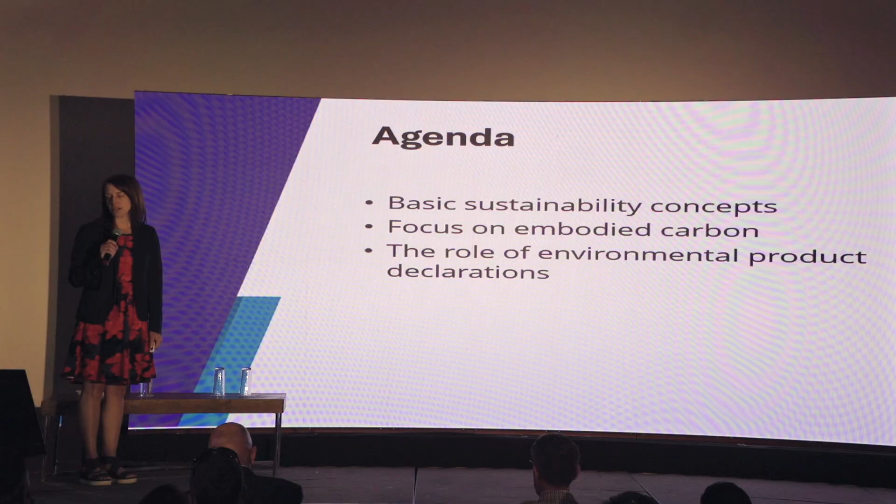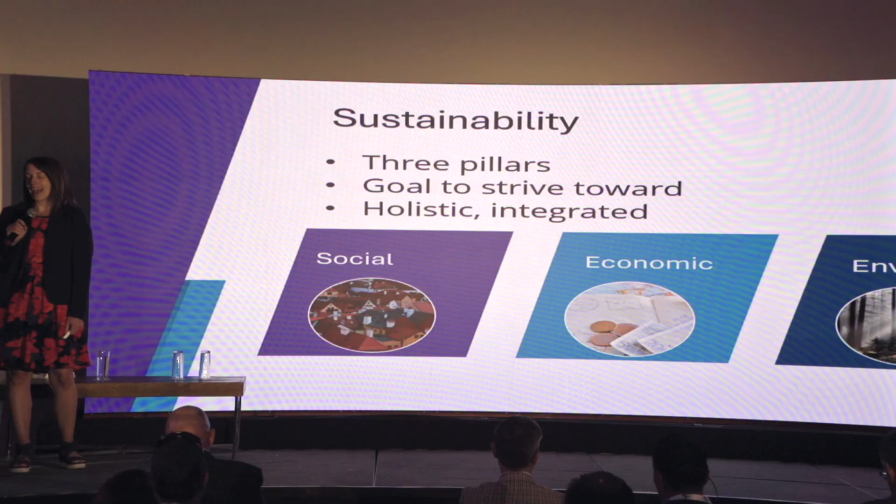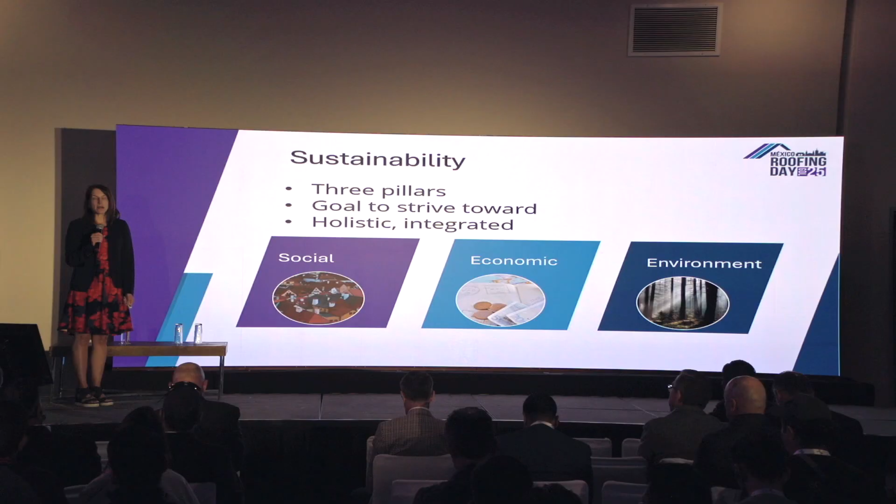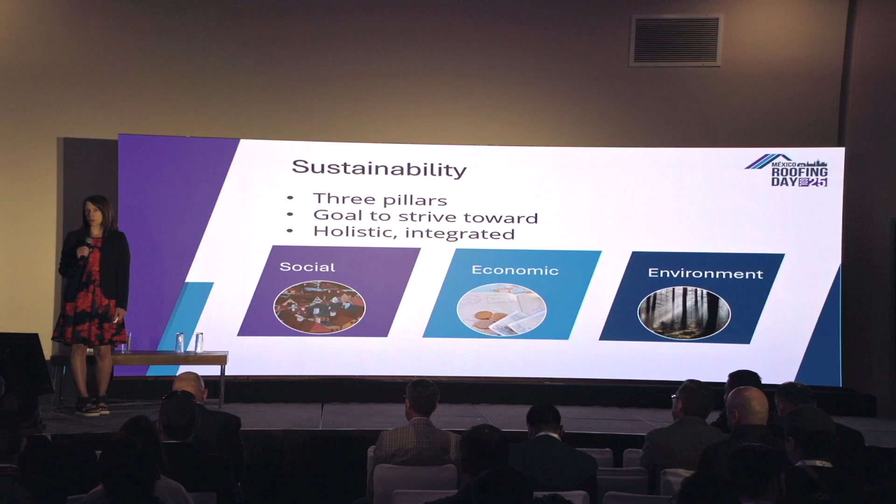All right, now if we start at the very high level, sustainability actually has concepts related to environmental impacts, our impacts on society, and as well economic impacts. Typically when people talk about sustainability, they're only talking about environmental impacts. But 30 or 40 years ago, when sustainability first came to the forefront, the focus was that we really need to keep all of these concepts in the front of our mind, because if you can't afford to do a project, or if you have to inconvenience the public so much in order to reduce your environmental impact, then it's really not sustainable.

And sustainability can be used as an adjective for many different things. You've heard of sustainable manufacturing, sustainable design, sustainable buildings. But why are we focusing on buildings so much? The truth is that buildings impact the environment overwhelmingly when it comes to the amount of energy that we use globally. The use of our buildings accounts for about 36% of global energy use, and that energy use also contributes to our global greenhouse gas emissions. In the US, 40% of the energy usage goes to buildings.

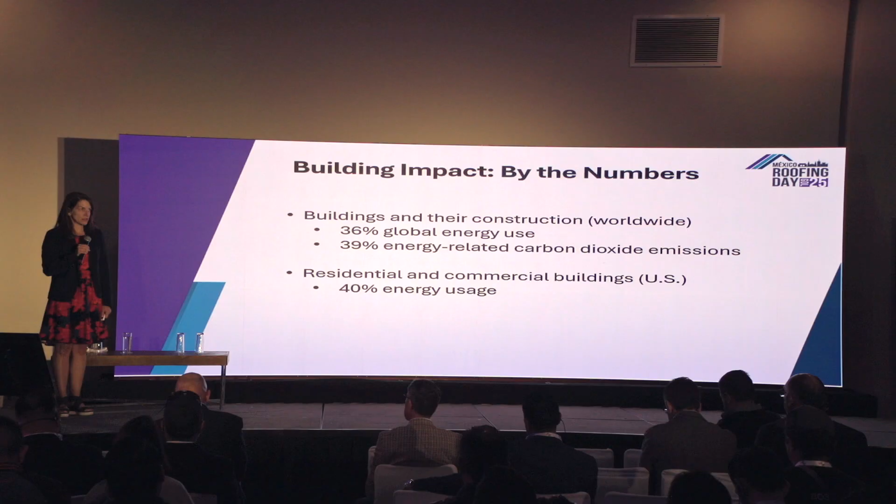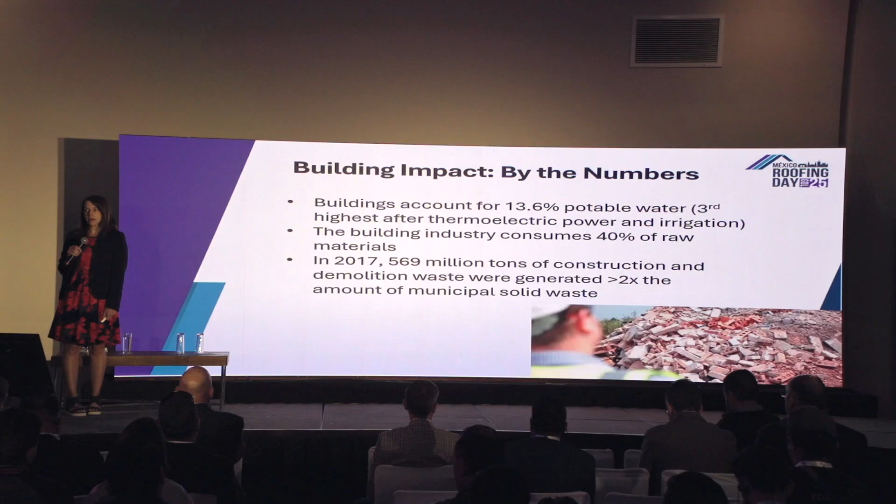Our buildings also use a lot of water, and certainly in some areas of the world, water is a very scarce resource. So the fact that almost 14% of all potable water is used by buildings is something that we should be mindful of. And we also consume a lot of raw materials, and we generate a lot of construction waste using our buildings.

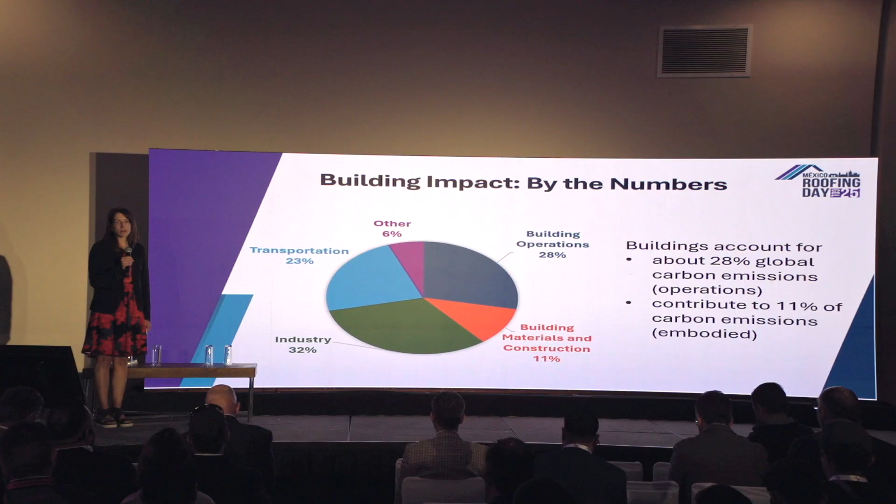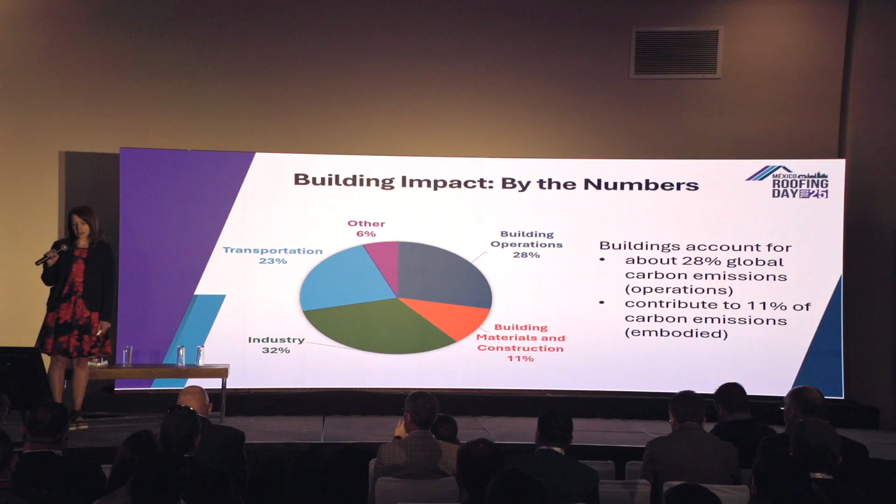So this is just another graphic to show the global carbon dioxide emissions attributable to buildings. And you can see that 28% of our greenhouse gas emissions are attributed to the energy use during our building operations, and another 11% or so is attributed to the materials that we use in our buildings. That's where we get the 39% of the greenhouse gas emissions. Other emissions are attributed to other industries and, of course, the transportation sector.

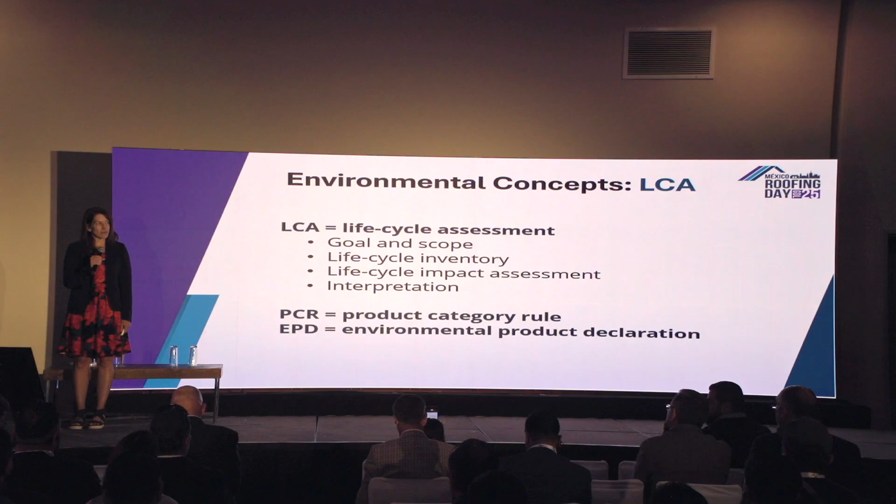When we speak specifically about environmental impacts, one of the concepts that is important to understand at a high level is life cycle assessment. You may have already heard of life cycle costing. This is very frequently used by customers that own their buildings and use them for a long period of time, factoring financial choices into initial costs and then maintenance and replacement costs. Life cycle assessment is similar to that, except instead of using dollars, we're talking about environmental impacts.

It's a method that we use to quantify the environmental impact of the choices that we're making and the products that we're choosing. We perform a life cycle assessment in order to develop an environmental product declaration.

So for any type of product, whether it's an asphalt shingle, and that's the example that I'm going to use today, or any other water barrier or any other material that we may use on the building, our fenestration, our windows, we can develop an environmental product declaration for those products that is a snapshot of their environmental impact.

And related to that is product category rule, and those are the additional rules that we use for a certain category of products, so maybe all roofing membranes or all insulation types will have a product category rule, which helps ensure that the EPDs we develop in a given product category are developed relatively the same, so that they have the ability to be compared.

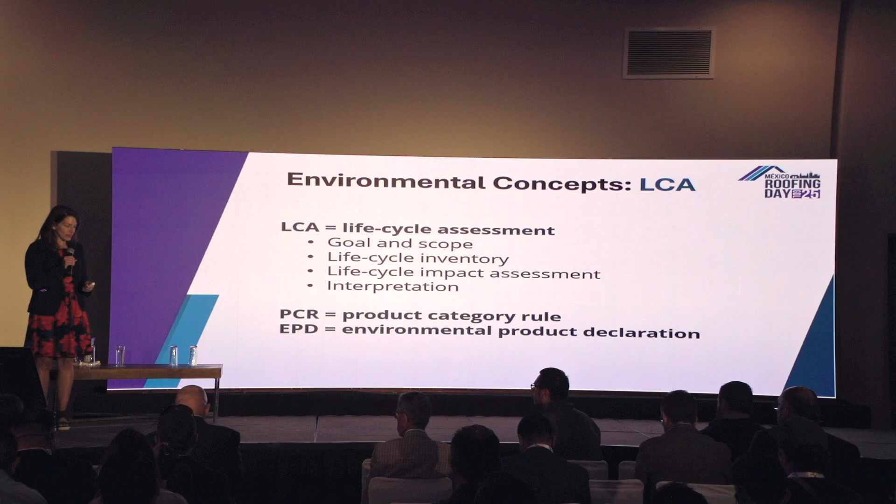Now, we've already talked a little bit about why we are focusing on embodied carbon, although you may not have realized that that is what I've been talking about thus far. When we do these life cycle assessments, we typically look at 5 environmental impact categories. They are up on the screen here. So acidification, what is the potential for creating acid rain? Eutrophication, what are the runoff from our farm fields that might cause algae blooms in our freshwater sources?

Ozone depletion, that is pretty self-explanatory, as is smog formation. So those 4 categories are also evaluated every time we do an LCA and develop an EPD. But the one we're focusing on is the global warming potential. And that is where you're going to find your embodied carbon.

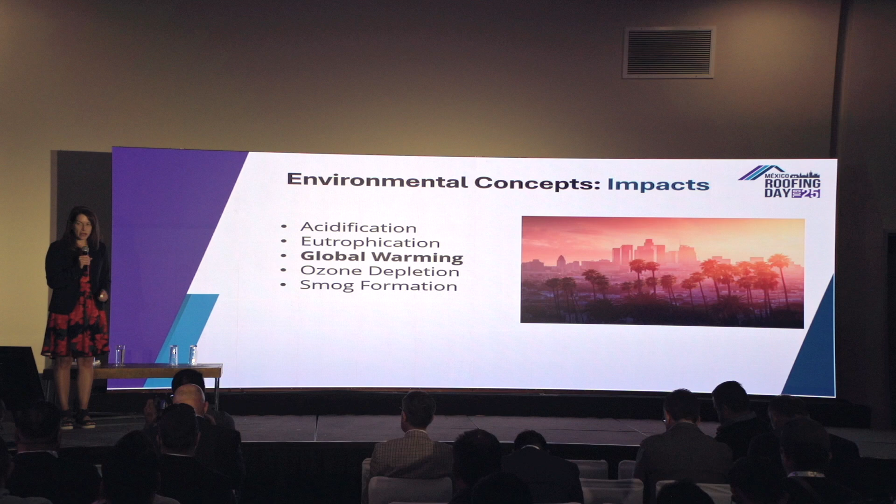So there are a few definitions out there for embodied carbon. They mainly have to do with summing up or adding up all of the greenhouse gases that are generated and emitted due to a certain product. And so it's either this ISO definition here, which is related to greenhouse gas reporting, which has to do with the emissions and removals, because some products do absorb greenhouse gases while they're in service or during production. And we're looking at just that single impact of climate change or global warming potential.

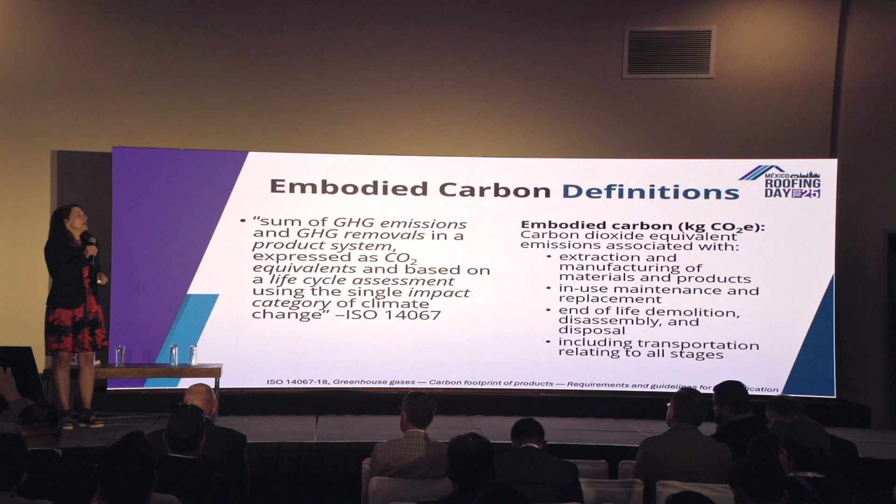The other way to look at embodied carbon, and this is from a structural engineering document that's out, is it's the carbon dioxide related to all parts of your production process for a product, from the extraction and processing of raw materials, transportation of those materials to your manufacturing facility, any greenhouse gases that are emitted related to use and maintenance, and then at the end of life.

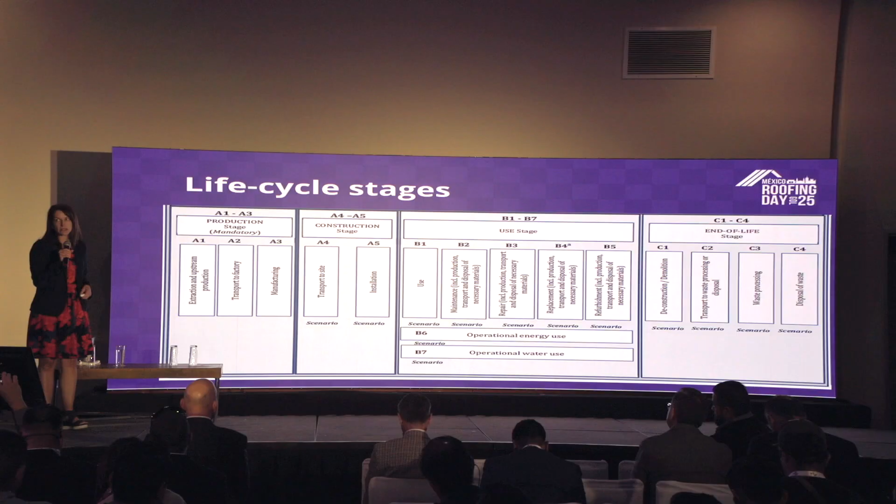When we talk about life cycle assessment, we typically break our product or our building life cycle into these life cycle stages. And so, starting with the letter A, any modules that begin with the letter A occur prior to the building being occupied or getting your certificate of occupancy. So it's production of all the raw materials in A1 through A3, and then transportation of those raw materials or products to the job site in A4. A5 captures all the greenhouse gas emissions that occur on the construction site.

And then once we get to the letter B, that is our use stage. And hopefully that is the longest time period on this continuum. And so that's where we categorize any of the greenhouse gases that are due to replacement and maintenance schedules. And then finally, anything that begins with the letter C, that is at the end of life. And so if you go to the end of life when considering your impacts, that would be what are your impacts related to demolition, recycling, transport to recycling facility or a landfill.

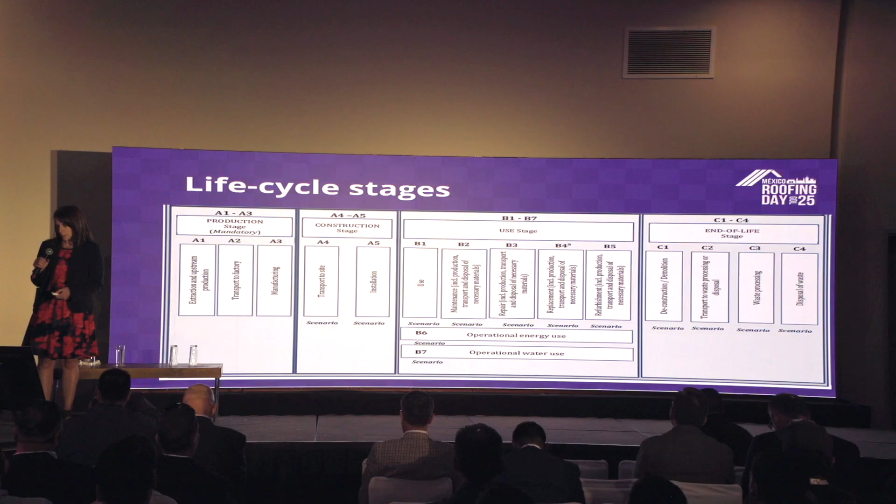Okay, so we already talked at a high level about what environmental product declarations are. They are developed according to an ISO standard, 21930. This is the ISO standard that we use typically in North America for developing EPDs. It gives us the rules for how to perform our LCA, and how to report our results in an EPD for all different types of building and civil engineering works products.

As I mentioned already, also, the product category rules are typically developed by industry trade groups for a specific type of product. So there are PCRs for insulation. There are PCRs for different types of windows. There are PCRs for different types of claddings. And so the PCRs are what helps ensure that if two different manufacturers develop an EPD for the same type of product, that the methodology behind the scenes to develop that was basically the same.

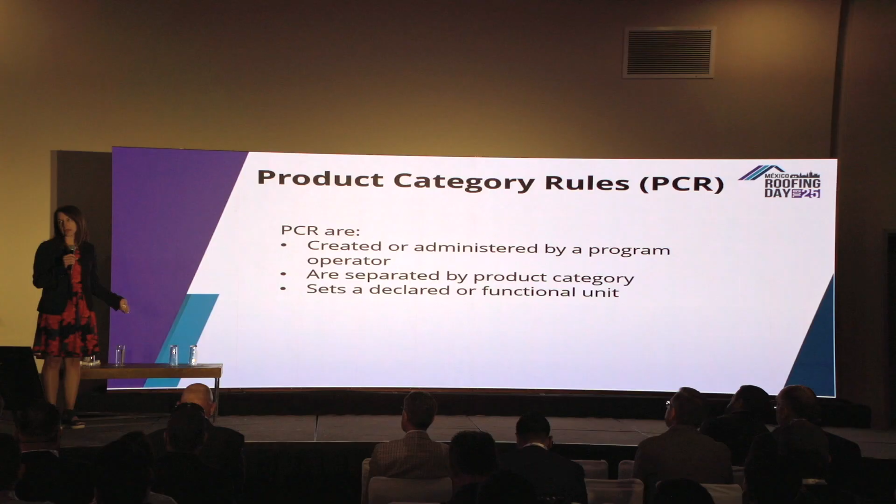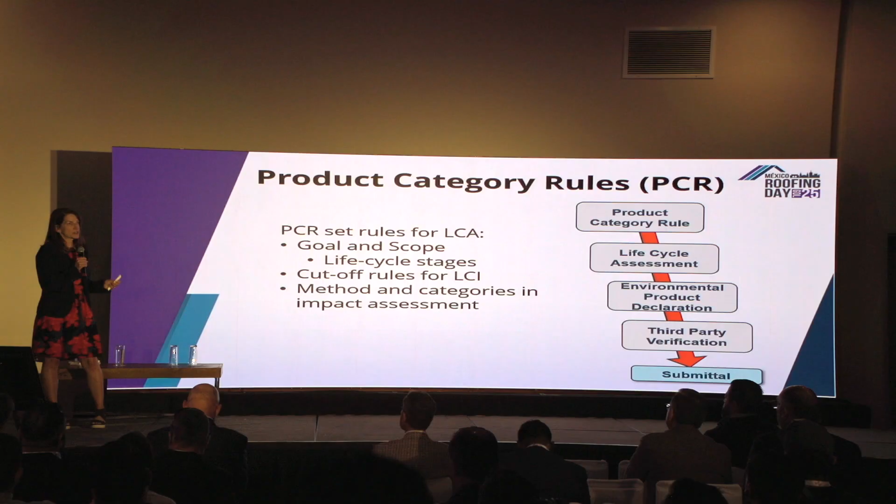So what they tell us in the PCR is that for those unique types of products, they decide things like how long do we assume the service life is, or what types of data should we be using in the background, so that we're really minimizing the differences between how two individuals could develop an LCA or an EPD, to minimize the differences that are due to choices that the LCA practitioner makes, such that the differences reported in the EPD are more likely to be due to true differences in the environmental impact of a product.

So an important thing to note about EPDs is that they are just a summary of a full assessment or a full model that has been created by an LCA. It's typically what we're using right now in order to report our embodied carbon data. But it's very important to know that because of the importance of the product category rules, or the PCR, when someone is trying to compare two EPDs, it's very, very important that the EPDs were developed using the same baseline PCR, which you can think of like a standard for how to develop the EPDs. Those need to be the same in order to even begin to think about comparing.

So frequently what will happen is, an example that I like to give is for concrete. I'm going to switch topics, we're off roofing for a second. For concrete, there's a difference between concrete that's cast in situ, or in place, versus concrete that's prefabricated in a facility. But sometimes, let's pick on architects. Let's say an architect says, oh, concrete is concrete.

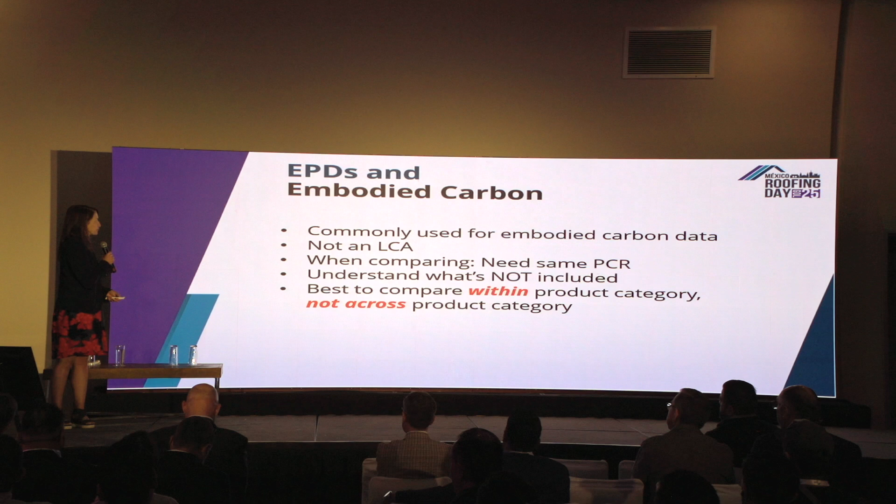All right, so when we're doing our analyses for embodied carbon, I'm going to go through an example using asphalt shingles. So when we're collecting data in order to develop an EPD for an asphalt shingle, when we think back to those different modules, A1 is our raw material sources. So you're collecting data for all the different components that go into making that asphalt shingle. You're going to have the asphalt, sand, you might have some mineral stabilizers, granules, scrim, lots of other things that go into creating that asphalt shingle.

You also have energy. You may have natural gas used in your facility, you likely have electricity coming into your manufacturing facility. Some of those energy sources and all of your raw materials are going to be transported to the asphalt shingle manufacturing facility. So A2 is where we capture all of the impacts related to transport of those raw materials to our manufacturing facility. And then A3 captures any of the environmental impacts that occur due to the actual manufacturing process. And this would be considered a cradle to gate scope. Most EPDs only have this scope right now.

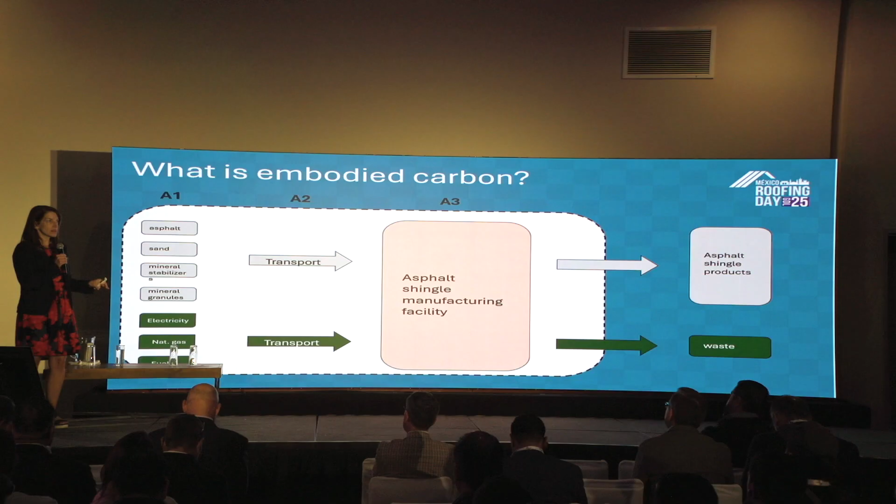So this is our scope. You can see our system boundary has the dotted line. And then when we do our mass balance of the system boundary, we're checking that all the materials coming in A1 are going out of the facility either as product or as waste.

When we talk specifically about embodied carbon, usually what's happening is that when we have all these different input materials, such as the asphalt and the sand and the granules, those products also have an upstream manufacturing process. For the sand, it may just be a quarry that those materials are being dug out of the ground, but that uses energy. For the asphalt binder, that's a much more complicated production process, but there's energy related to that.

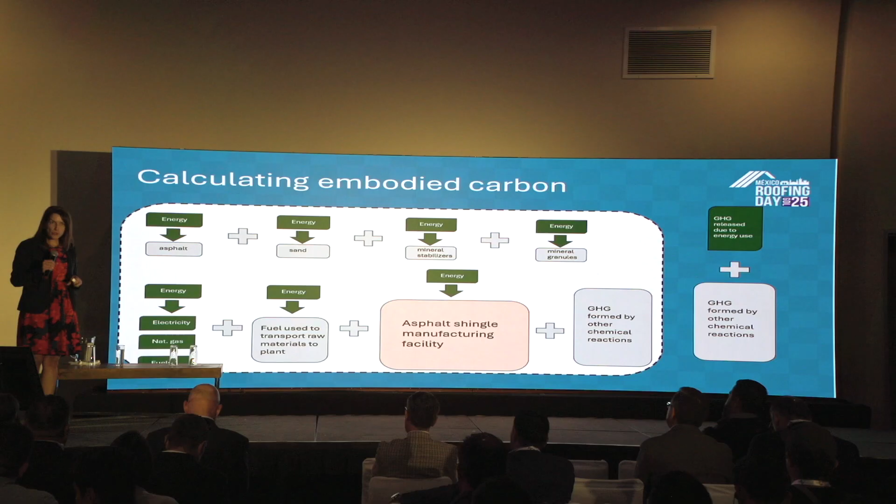So there's energy in all these different phases that are used as you go through the process. And so that energy, if it is not a renewable energy source, if it's a fossil fuel based source, when we burn that energy in order to do all of these things, that releases greenhouse gas emissions into the atmosphere. And so that's really what we're trying to capture in this process.

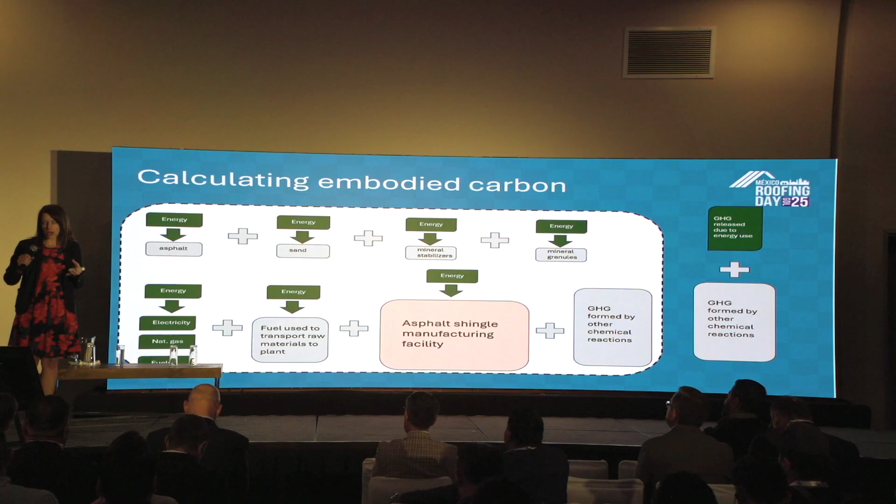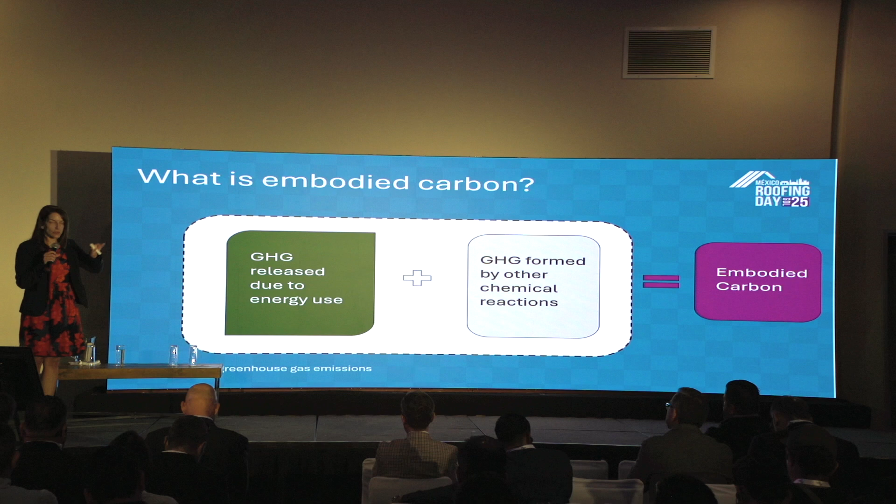So for the most part, it can be summed up for any manufacturing process. Your embodied carbon is basically the greenhouse gases released due to energy use in all the stages, plus there are a few chemical reactions that occur for certain products that also release greenhouse gases. So those all get summed up, and that becomes your embodied carbon.

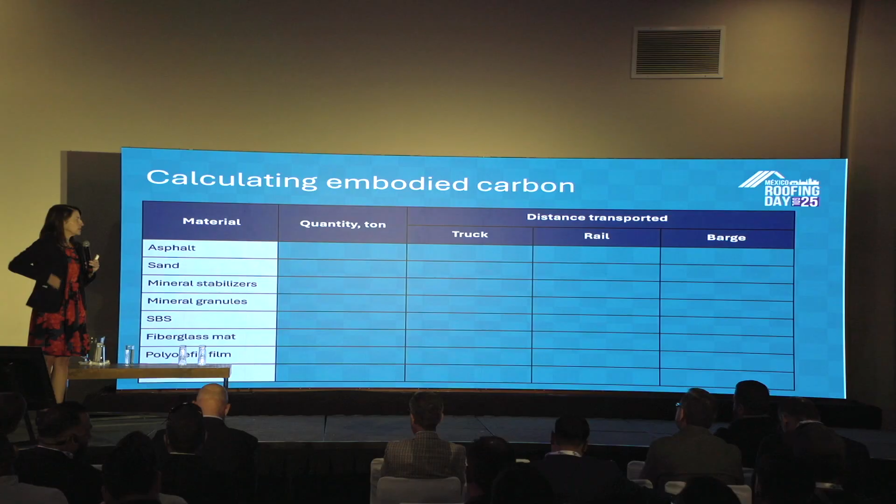If you are a product manufacturer and you have to supply data in order to develop an EPD, don't be too worried—you don't really have to understand greenhouse gases and LCA too much. As a manufacturer, what the LCA practitioner is going to collect from you is stuff that you are already tracking.

And you're already tracking it because you pay for it. So you are purchasing quantities of raw materials, you're purchasing quantities of energy, and the only thing you may not realize is the distance those materials are coming from, whether it's a distribution facility or the primary manufacturing facility for each of these upstream materials.

So if you're a manufacturer looking to develop an EPD, you would provide to the LCA practitioner your annual, 12 months' worth of quantities purchased, and they do all the work of converting all of that into environmental impacts.

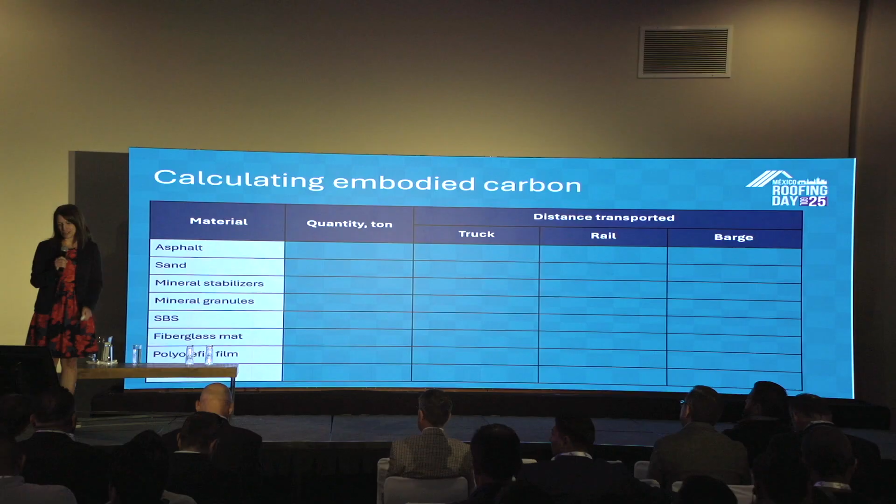What comes out on the other side is your environmental product declaration. So if you are a contractor, a consultant, or a product manufacturer, and someone asks you for embodied carbon data, you will look to an EPD to provide that for them.

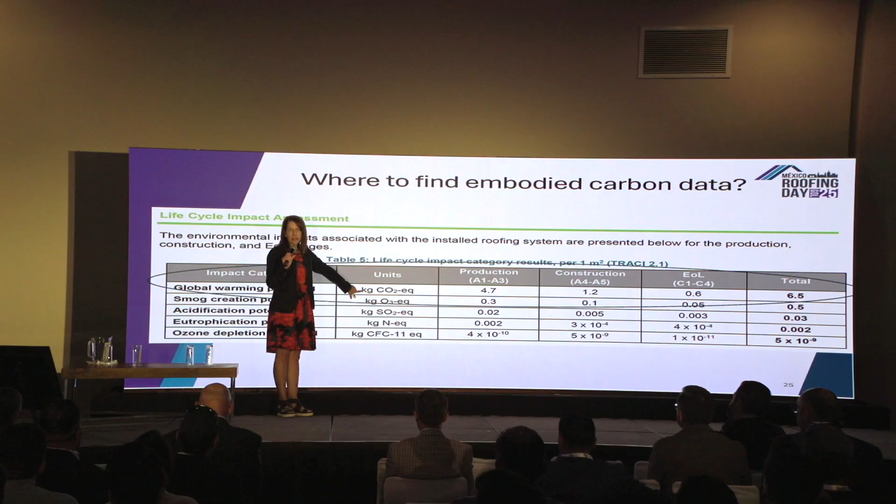What you're going to look for is global warming potential. It may say climate change, but probably not—if you're looking for it in North America, we typically use global warming potential as the indicator that is our embodied carbon. The other thing you want to look for, just to double check, is the units.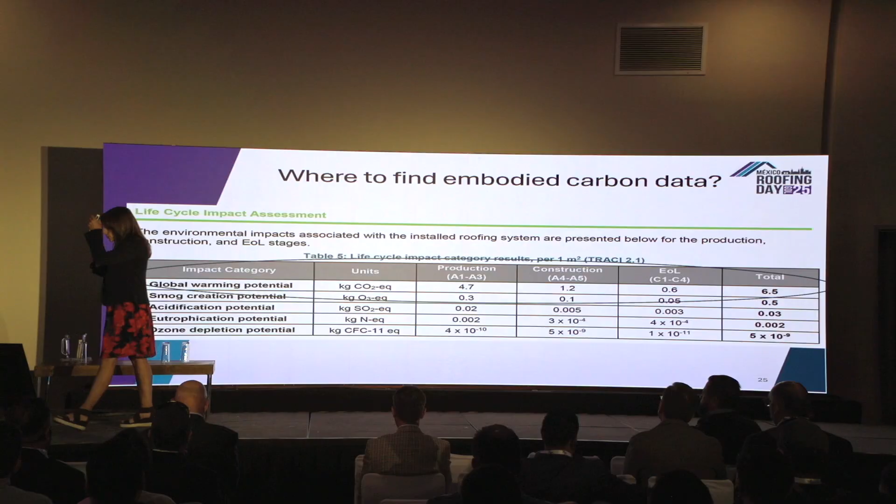So global warming potential or greenhouse gases are reported in units of kilograms of carbon dioxide equivalents. What they do is take all of the greenhouse gases we're tracking and equate them into an equivalent of carbon dioxide. So even if the impact category name is slightly different, if you look for the units of kilograms of CO2e, that's always going to tell you that's embodied carbon.

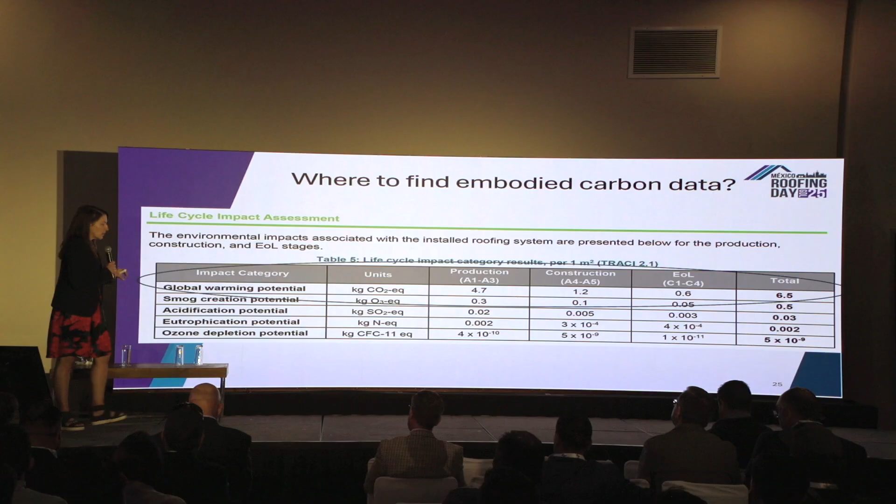In this particular EPD, they do report out more life cycle stages than just the cradle to gate. If we were talking about just cradle to gate, then we would be talking about just these life cycle modules, A1 through A3. In this case, they actually did report out for the construction impacts as well as the end-of-life impacts. That's not super common—it's becoming more common, but not super common right now.

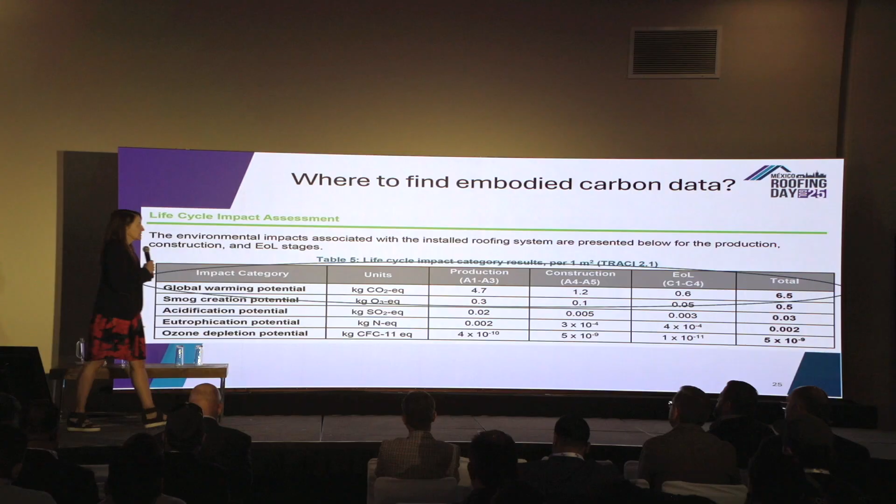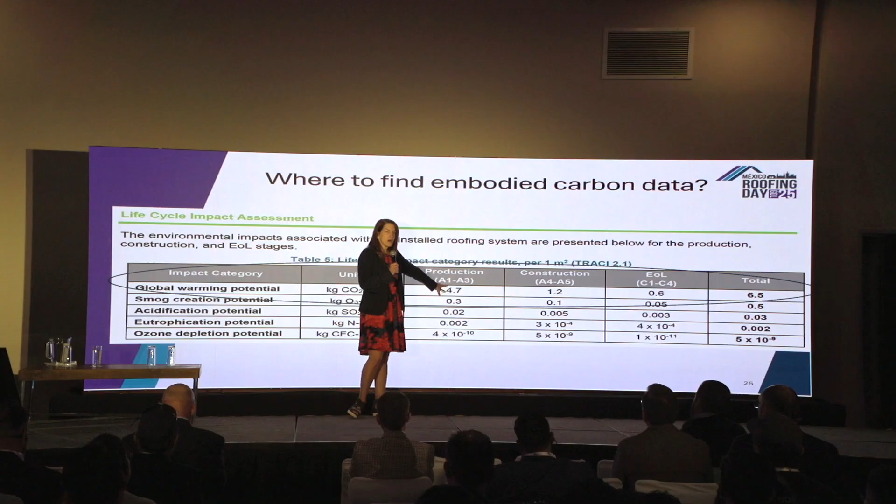Usually you will see the total greenhouse gas emissions aggregated, or summed, or added together for A1 through A3. You may also see them broken out so that it's A1 plus A2 plus A3 that you would need to add up. But this is where you're going to find every EPD has a table just like this.

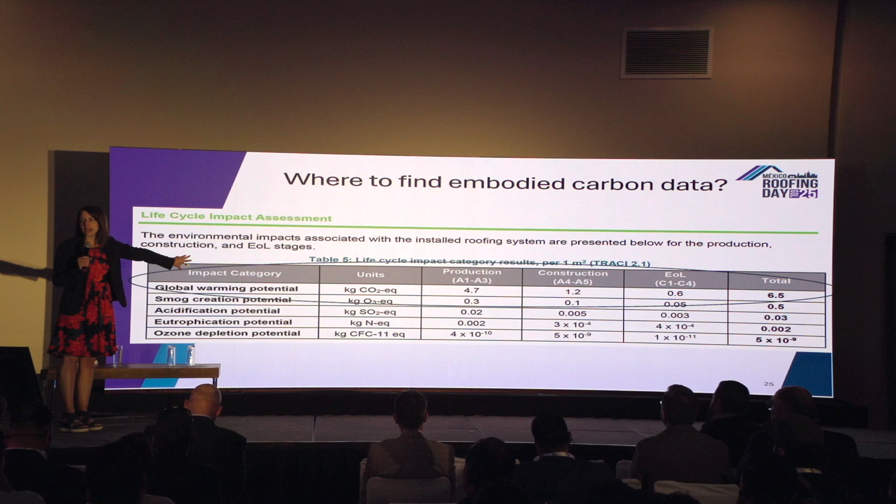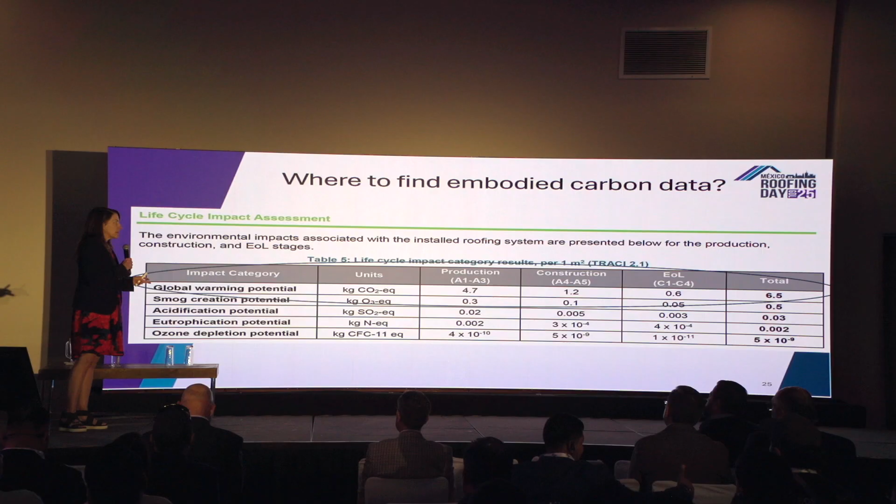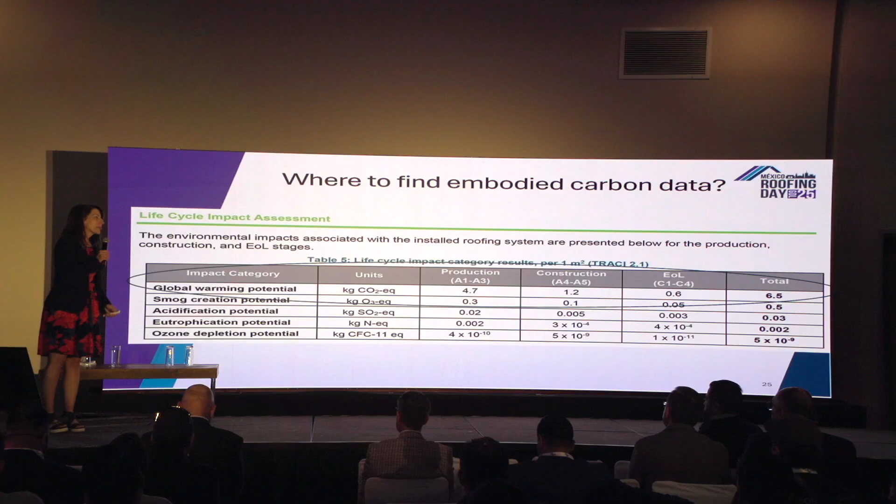So you just need to look for that kilograms of CO2e in order to find out what the embodied carbon is. You also just want to make a mental note of how it's reported. In this case, the units are reported per square meter of applied product. That sometimes can vary—it's almost always a mass, volume, or area reporting unit.

Okay, so just a little bit more information on EPDs. This is one that I just pulled off the internet. Most of the EPDs, the great thing about them, in addition to being third-party verified, is that you have greater assurance that the data reported is accurate.

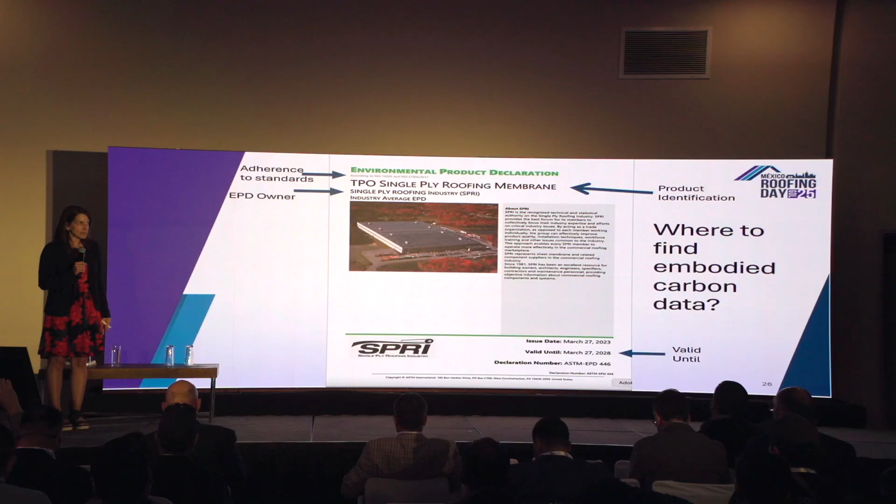They're also required to be posted publicly. So there are databases that publish all EPDs, there are program operator websites that publish EPDs, and most manufacturers will publish EPDs if they have them to their website, or you just have to call your local rep and they'll send it to you as a PDF.

So a few things you just want to note: the top line there shows you which standards they conform to. And as I mentioned, almost always it's going to be ISO 21930.

Some European companies also generate their EPDs according to an EN standard, a European standard. That one's called EN 15804. So you may see that referenced in there.

I'm only bringing that up because occasionally in the specifications, they may say which standard you're supposed to conform to. The EPD owner is almost always published on the front page.

It's typical for an industry average EPD to be developed by a trade association. So in this case, it's a single ply roofing industry association, because it's an average for their entire industry.

The product name, or what products it's covering, is also included. The validation date — most EPDs are valid for 5 years. They have to be renewed after 5 years.

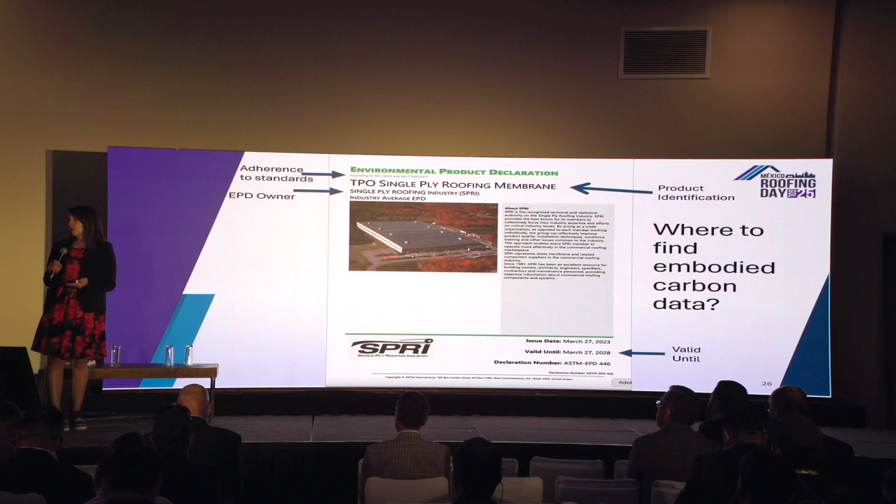So they may publish more frequently than 5 years, but they're only valid for 5 years. All right, again, this is another page.

Typically there's a cover page on the EPD, which is what I showed on the last slide. Then there's a second page that has all this declaration information in it.

This is just to show you that when you're reading your specifications, it may say certain things, like what the product name has to be. There may be an ASTM standard referenced.

There may be other information that you will find in the EPD. You just need to look for it, because it's not always in the exact same place.

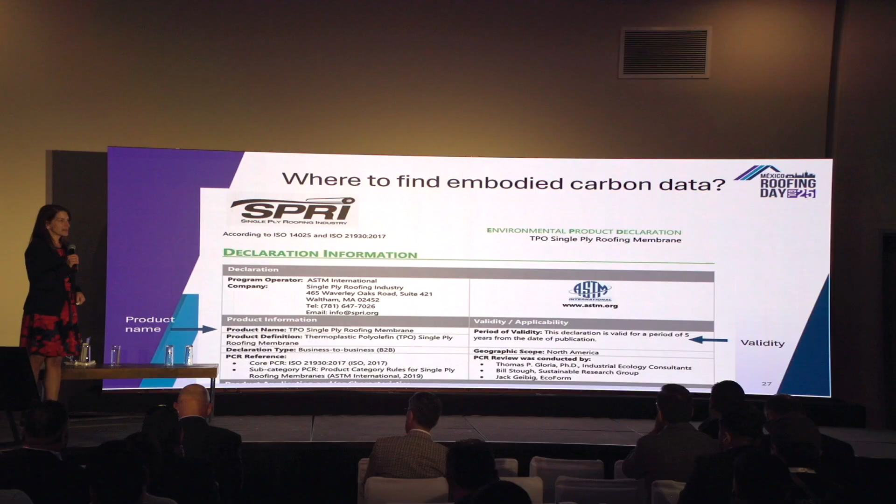But as I said, these aren't very long documents, so it's usually pretty easy to see. There are a few program operators in North America. ASTM is one of them.

So you will see the program operator listed. They are the ones who administer the product category rules and also ensure that the EPDs are verified appropriately.

So they're kind of your third-party QC check, making sure that the data in these EPDs is valid.

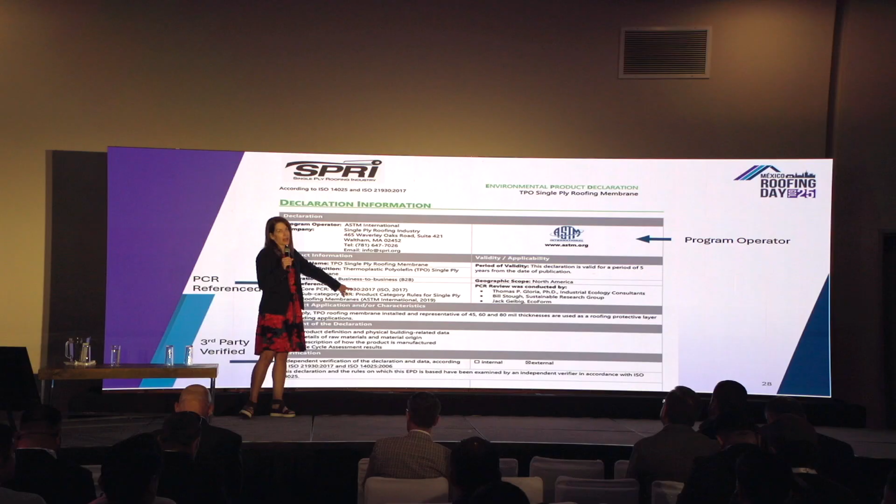An important thing to note is you will always see the PCR referenced. So you'll see the ISO standard and/or the European standard reference, as well as the subcategory PCR.

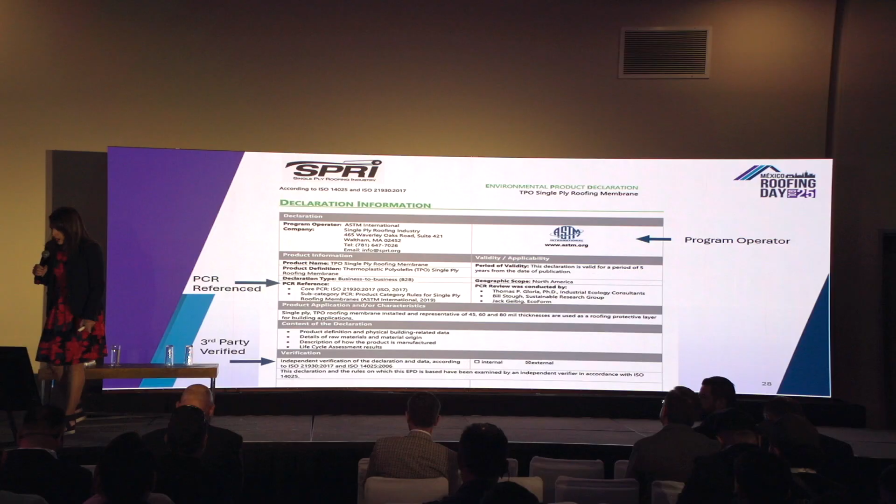So you can see that there's a PCR for single ply roofing membranes. If you're ever comparing a couple of products, you need to make sure that they conform to the same PCR.

It also shows you which life cycle stages or modules are included in the EPD. So this is showing that only these 3 modules are reported — this is the minimum that has to be reported. So this is a cradle-to-gate EPD.

It will show you which modules have been reported. This is also important, because as we saw a few slides ago, this is the minimum — some product manufacturers are now moving toward including additional life cycle stages.

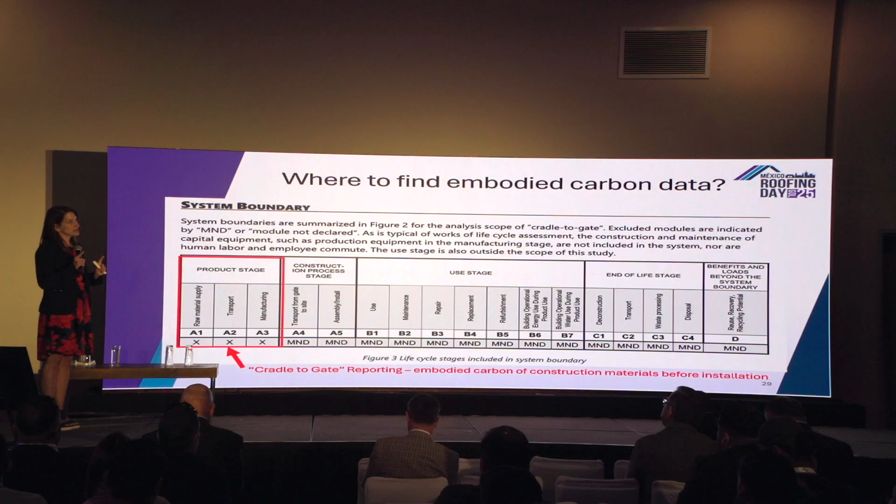So you can imagine, if you're comparing those two products, their numbers are likely going to be different — but it's maybe not because one is better or worse. It's maybe because one is just including more information.

And this shows where the modules are reported separately. So they report the A1, A2, and A3 separately, but then they also add it up.

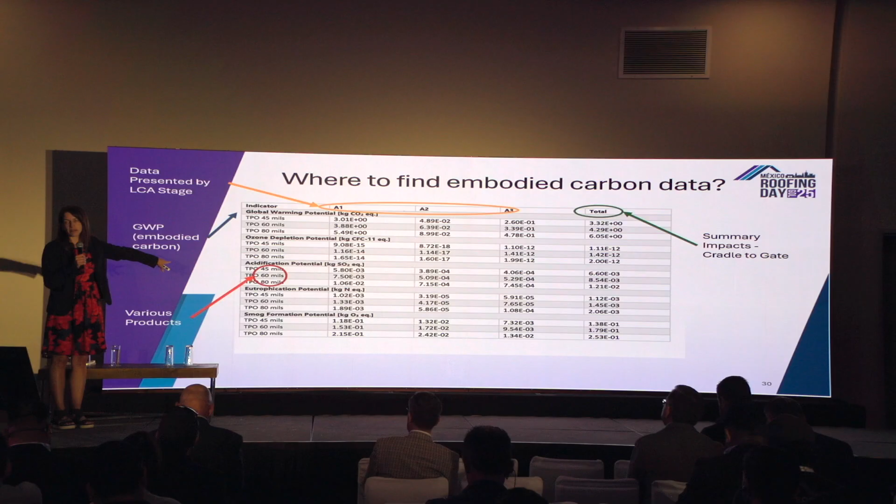In the last column there, you also want to make sure that when you're looking at different products, you're looking at the total. And this also breaks it down by the different types of products included in the EPD.

Okay, so we did cover a lot in a short amount of time. I am here for the next 2 days, so if you have any questions, of course we have time for questions, but I would be very happy to answer those.

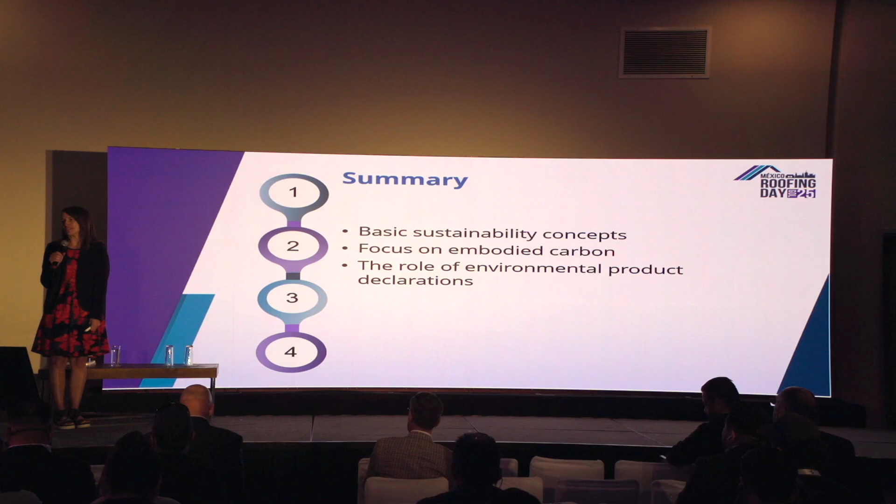So when they get to the point, if they start instituting the LEED rating system, or some owners are requesting EPDs, it's important that we're able to say, let me check on that and I'll get back to you, rather than, I don't know what you're talking about. So hopefully I've given you enough to say, let me check on that and get back to you.